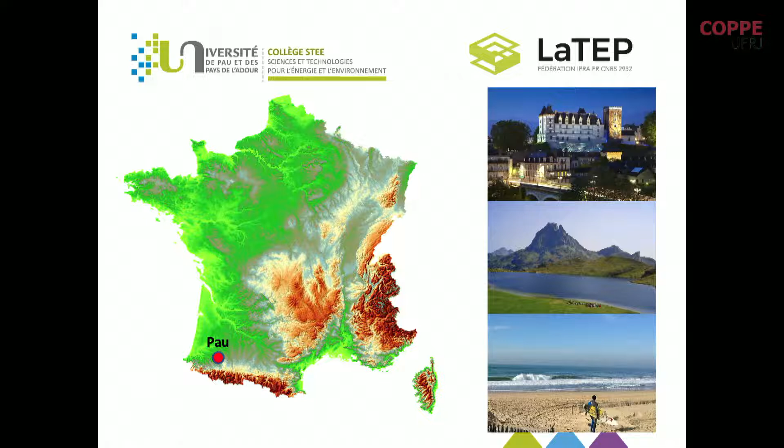Okay, so about my university. Since 2017, the University of Pau won an important award for excellence. It's called an I-SITE, and only 18 universities in France get this kind of award, so this is very important. We are the only small university, because we are only 15,000 students, that was able to win such an award, but that is because we have very powerful research activities, because the headquarters of the TotalEnergies group are located in Pau. So with the researchers of the University of Pau, plus some of the researchers of the research center of Total, there are about 1,000 people that work within this energy and environment solutions I-SITE.

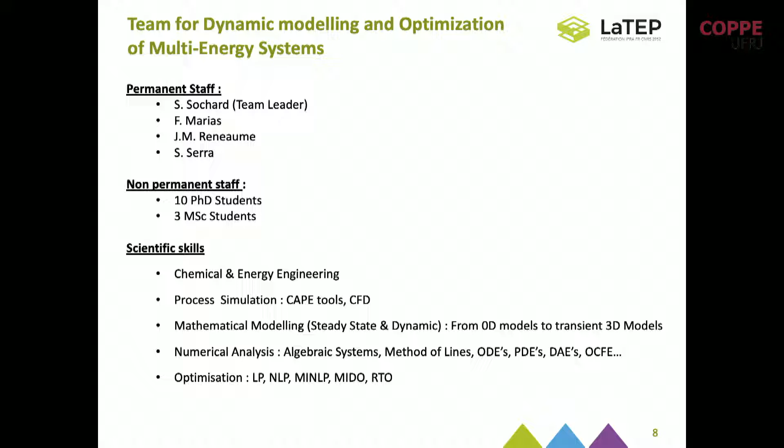Well, about our activities, the core of our activity is steady state and transient modeling and optimization of energy systems. So the skills that we need to do such research activity are, at first, basics in energy and process engineering. So of course, thermodynamics, heat and mass transfer, fluid mechanics, computational fluid dynamics, unit operations.

We also need skills in optimization: linear programming, nonlinear programming, mixed integer nonlinear programming, and so on, dynamic optimization, and recently dynamic real-time optimization, and also optimal control. Of course, we need some numerical analysis, so numerical methods, and we are still programming in Fortran. Maybe it sounds like an old language, but we still use it, and also MATLAB and C++.

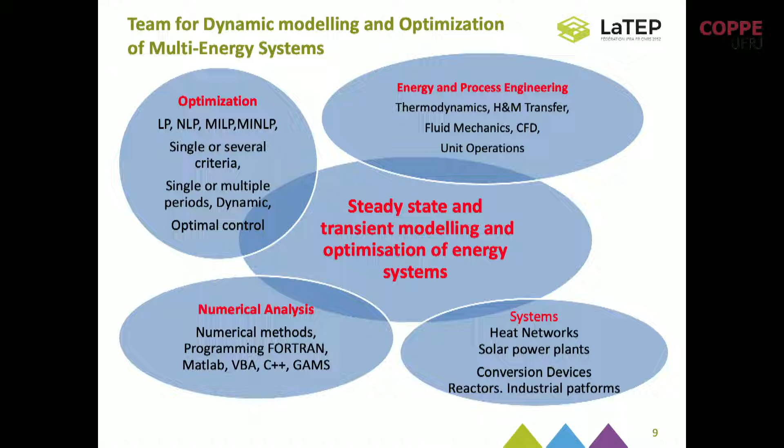And the systems on which we focus are heat networks, solar power plants, conversion devices, and reactors and industrial platforms. So here is the scope of all of our activities. We have here the primary energy sources: the sun, the wind, hydroelectricity, biomass, geothermy.

And so we have all these primary sources that are renewable, and we need to convert them so that we can produce electricity, which is going into the grid, produce gas that is going to be circulated in a gas network, and produce heat and cold that are going to be delivered to habitations through pipes and networks. So we are speaking here, for example, about conversion.

So biomass can be converted into gas using anaerobic digestion or gasification. When you do anaerobic digestion, you produce, of course, some methane, but also some CO2. So if you add hydrogen to this carbon dioxide, you can run the Sabatier reaction and then produce methane. And to produce the hydrogen, you can have solar panels that produce electricity, which goes to an electrolyzer that will produce the hydrogen.

So we build mathematical models of these units, and then our goal is how we can make them work together in the most efficient way. For example, regarding the demand for heat or gas, regarding the weather forecast, how the sun shines, what is the operation that we should run? Should we put into operation the catalytic Sabatier reactor or not, or store? This is all of this. We want to optimize such operation.

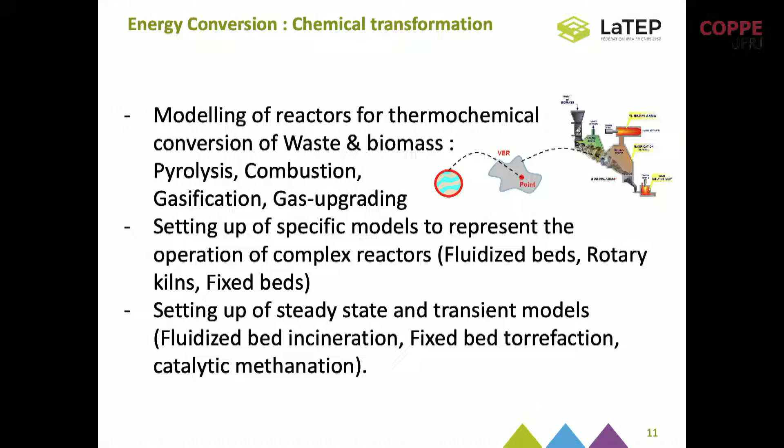So at first, a historical study that deals with fluidized bed incineration of sewage sludge. It's historical because this was the subject of my thesis some years ago. Here we've got an industrial fluidized bed reactor for incineration of sludge. As partners with the Veolia company, we built a mathematical model. We relied at first on Levenspiel's work on fluidized beds.

Then we considered that the bed was a bubbling one. So we built an assembly of reactors. The bubbles circulate as a plug flow. We have a CSTR for the other part of the gas and two plug flow reactors for the freeboard of the reactor. Using this kind of assembly of ideal reactors that we all know in chemical engineering, we were able to understand how the incineration of sludge operated within the reactor.

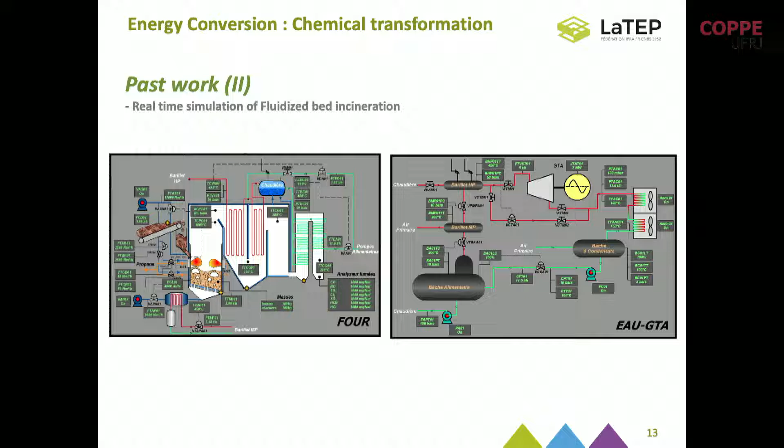Another activity: with this first model, we built a real-time simulator for fluidized bed incineration. This kind of tool is used for the training of the operators. By now, when Technip, for example, builds some refinery for Qatar, for Saudi Arabia, or wherever, they also provide a real-time simulator for the training of the operators, because it's very convenient to have a numerical twin of the plant. So we did it for this fluidized bed incineration of sewage sludge.

Another activity that we have is linked to the pyrolysis of waste and biomass. Indeed, as we are building some mathematical models, the first step is the reaction pathway of pyrolysis. What happens when you heat a solid? Classically, we do it in a TGA for the thermal analysis. But in the TGA, you can only have samples of 2 to 5 milligrams. And it's so few when you are dealing with waste.

It's not relevant. So we have built this tool, which is a big TGA, which can hold up to 1 kilogram of waste. It is exactly the same as a classical TGA, except that we have a big load of waste that we can put inside. And you've got this furnace, we can control the heating rate, and we recover the products of the pyrolysis. We recover the condensable part, which are the primary tars, and we recover the permanent gases.

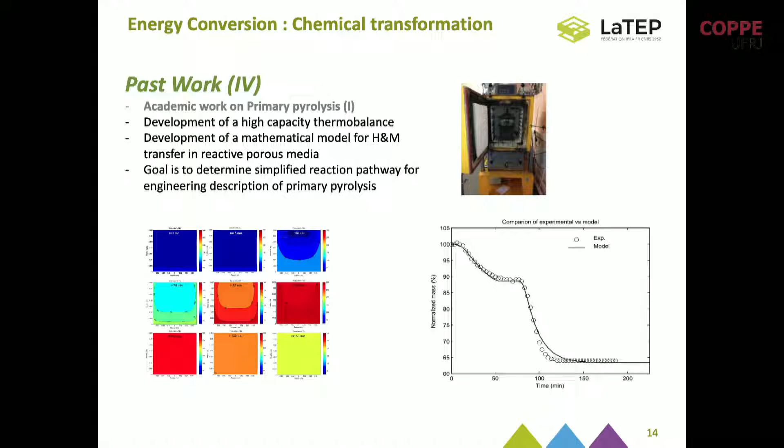And so if we look at the mass loss as a function of time, this mass loss with the dots corresponds to the experimental one, which is continuously measured, because here we've got a balance which is cooled and which allows for the weighing of the basket. And so we see that we have excellent agreement between the model and the experiments.

Another activity now is a collaboration that we have with Marco Castaldi at City College of New York and the Free University of Bolzano in Italy. Still we focus here on the primary pyrolysis. The system that we have is, for example, a sphere of wood. We locate here a thermocouple and a probe. This probe is linked to a gas chromatograph that will, every 3 minutes I think, pump inside the wood particle to extract the gases that are produced and give information on the primary products.

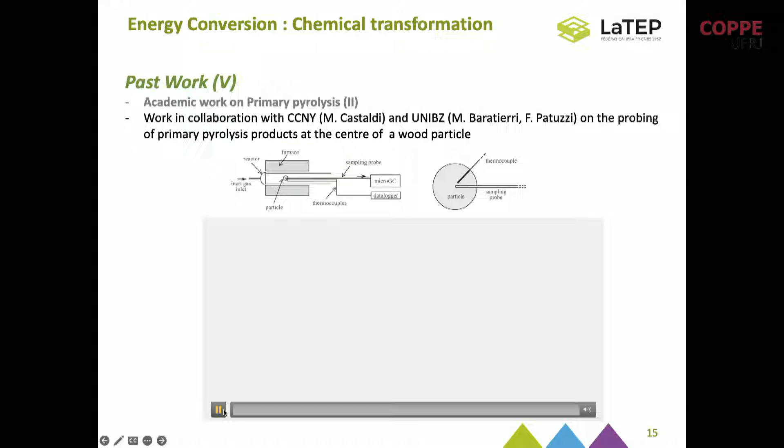Well, it's not, I can't do it as I would like to do. Okay. Okay, so, but we are able to predict. Okay, I should have done this.

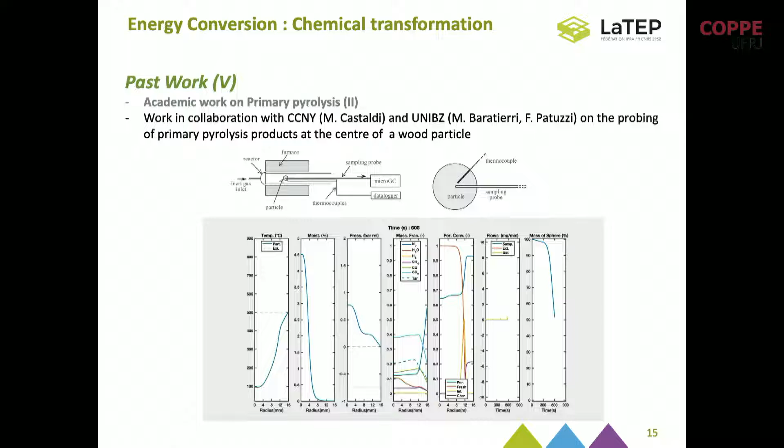Okay, so next. We also work on the thermal cracking of tars. When you deal with gasification, the main drawback for gasification is that you are producing heavy tars, like naphthalene, like benzene, like toluene. And so with a company which is called Europlasma, they built a gasification process with a gasifier and a high temperature unit to crack the tars that were produced during gasification. And the main characteristic of this reactor is that the high temperature is reached thanks to a plasma torch.

Okay? So we started from almost nothing. We start from a literature review to understand what are the tars that were produced. And so we begin to think about 4 model compounds, which were phenol, naphthalene, toluene, and benzene. And then, thanks to literature, we built the reaction pathway that can explain the degradation of tars through methane, through soot, through acetylene, and then at the end, the transformation of tars into carbon monoxide and hydrogen. What is interesting in thermal cracking the tars is that you keep the lower heating value. So we start from there.

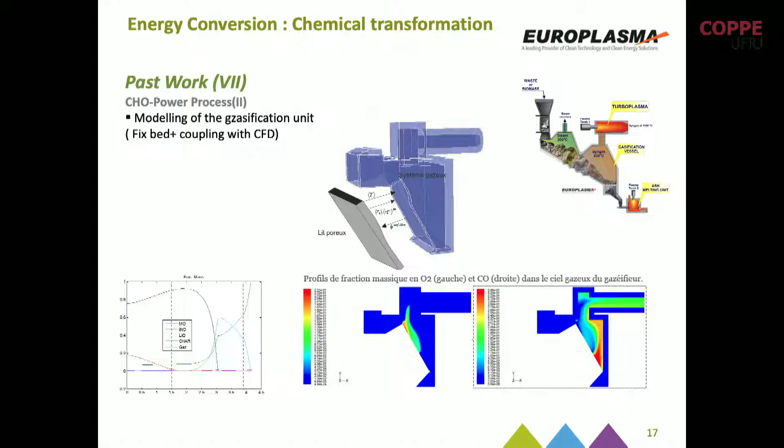And the homemade model is also able to compute the composition and the mass flow rate of volatiles that are released into the freeboard of the reactor. And so you have the coupling. And then you are able to understand how the gasification is operated. And just here, you've got this reactor. Okay, it's in the wrong order. I'm sorry about this.

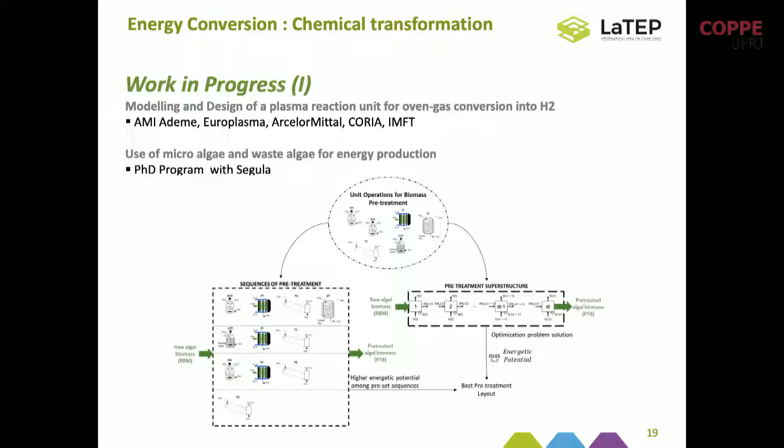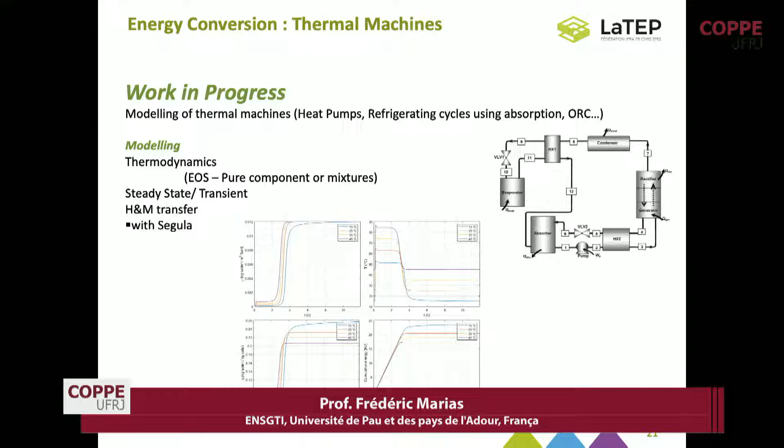Okay, we are also working on the adsorption machine, because when you speak about heat networks, the heat is produced, for example, by a biomass plant. But a biomass plant cannot be shut down and started up as we would like to do. So we need to store the energy when there is no demand. And so one possible way to store the energy could be by adsorption, meaning when we have, for example, some zeolites, if we adsorb some water on zeolite, we release the heat, while if we desorb, we store the heat. So it's a convenient way, and we have built a dynamic model to understand how heat could be stored and restored to the network.

Now, some important work that we are doing. I'm no longer in the field of conversion, but in the field of solar power plants. In some past work, we performed dynamic optimization of a solar power plant. A typical solar power plant is that one. We've got a solar field where we have solar panels that convert the sun irradiation into heat. This heat circulates in some pipes. Thanks to a heat exchanger, the heat can be stored and then finally delivered to some consumer.

Okay? So the first step was the mixed integer dynamic optimization of this kind of unit. I mean, we know the weather forecast and we know the demand. And so our algorithm computes the mass flow rate of water that should flow into the solar panel, that should flow into the storage tank, and so on. So this is a dynamic optimization problem, and our optimization variables are the mass flow rates of water that circulate in the whole system.

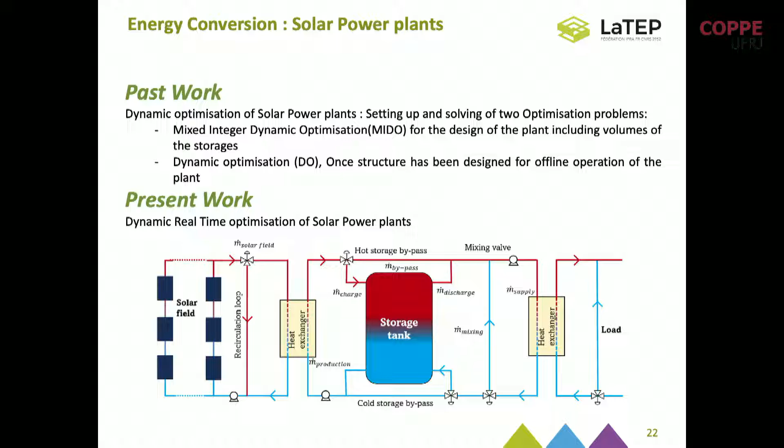So we had this optimization, but our present work deals with dynamic real-time optimization. Indeed, as I mentioned, the operation of the plant is driven by the weather forecast and the demand forecast. But weather forecasts are not 100% sure, so there might be deviations from the forecast. And if we have such a deviation, what do we do? Because what we computed as optimal is no longer optimal. So to do so, we use dynamic real-time optimization. And we are working on this with Professor Galo Carrillo Le Roux at USP, whom you know.

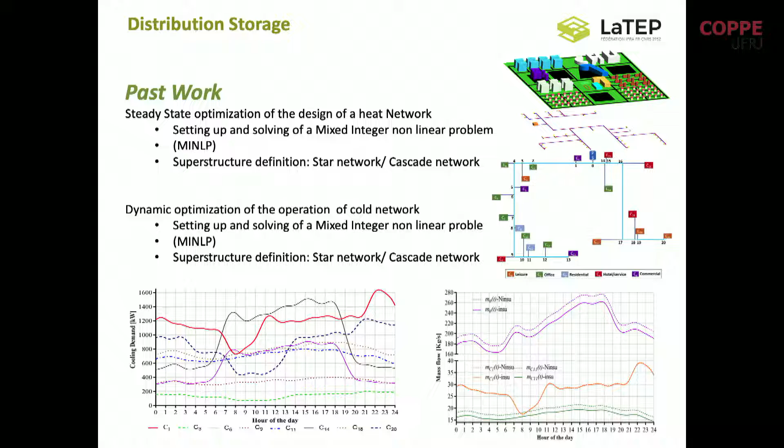So we designed a superstructure, and then the dynamic optimization algorithm was used to compute the structure and the diameter of the pipes. And also, if we finally have this network, regarding the demand here, which corresponds to the demand in habitations, malls, and so on, we are able to compute the mass flow rate in every pipe. Those are our optimization variables, and those are the results of the computation. You can see that we made the simulation with insulated pipes and non-insulated pipes. This is the optimization variable, the mass flow rate that circulates inside the network.

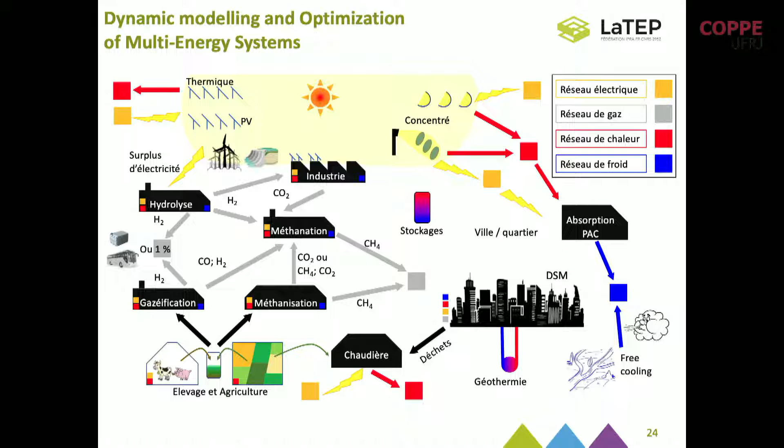Okay, so what I've shown you is that we have built models for this, for this, for this, for storage as well, and for absorption. But now, our aim is to put all these things together. So now we are working on several couplings: coupling electrolysis with a methanation reactor and with anaerobic digestion, because the three will need to work together.

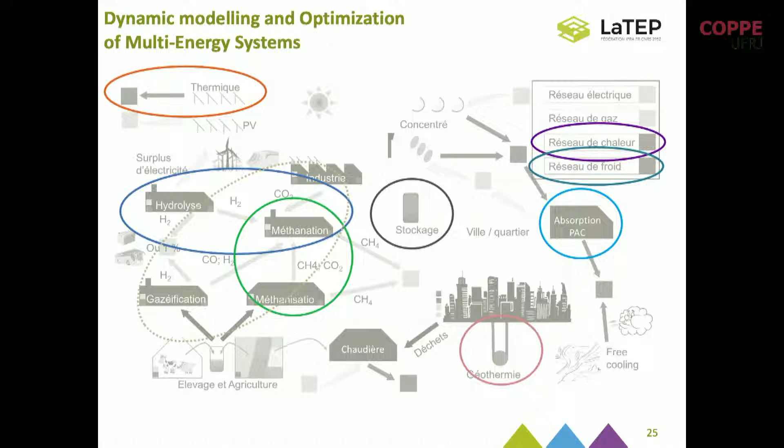In my city, in Pau, there is a plant that is going to be built at the wastewater treatment plant. The sludge is going to be put into an anaerobic digester, and then it will be connected to a Sabatier reactor and coupled with an electrolyzer. So we are building the connection between all our models to be able to represent such a unit. And our aim is to build all of this. This is ambitious.

At present, a very important field we are working on is the dynamic optimization of multi-energy systems. We want to do real-time optimization and connect this with big data. At present, we've got a program called Impulse, with an industrial partner which owns a gas network in southwest France and works on the same topic.

And we are starting a work, very important for us, and maybe we can find some connection, which is called Réseau Data, because we are going to work on a heat network located in Bordeaux. This heat network has a very large number of sensors that give us real-time information on mass flow rate and temperature. And we would like to use artificial intelligence, neural networks, to build a black box model on which we will apply real-time dynamic optimization.

Okay? That's one project that we are going to start now. We are also building some new unit operations because at present time we do not have any model for anaerobic digestion, and we are enhancing our models for gasification units because we've got the one for the grate furnace, but we would like to have a model for entrained flow reactor for gasification. So we are working on this as well.

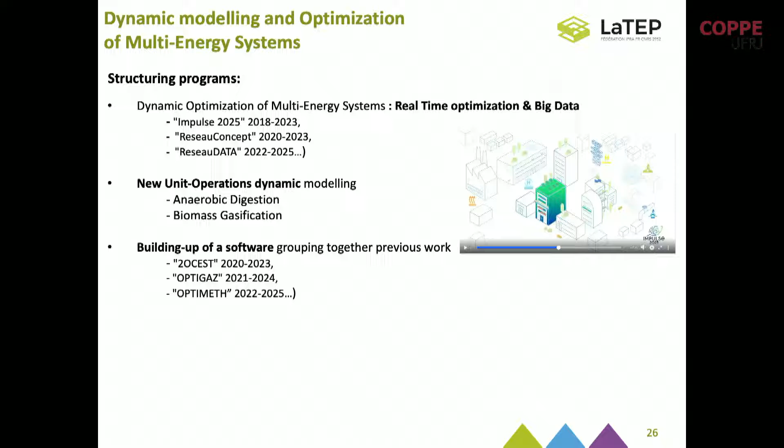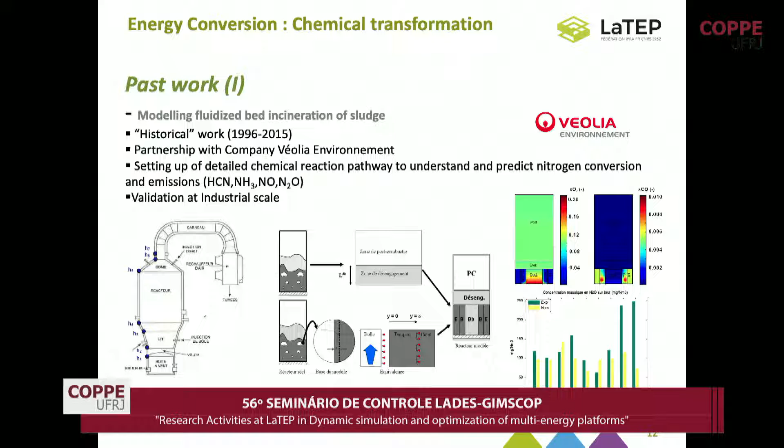Yes. But the bubble phase and the dense phase are just an idealization of those fluidized beds. It's not physically separated. No, they are not physically separated. But when you show this picture of their distribution, it seems that you are presenting this separation. Yes. This is a way to present the results. You're absolutely right. Indeed, the bubble phase is not continuous.

We have represented it as a plug flow reactor, but this is not a continuous phase, for sure. Yeah, but this is a way to represent, to some extent, how our model works. It looks like you are plotting the temperature, and in this case the concentration of oxygen, and here CO. This is oxygen and here this is carbon monoxide, which is more concentrated in the middle of the fluidized bed. But these are ideal regions, not the space of your reactor.

No, it corresponds indeed to that view, this idealization, not the real space of the reactor. Absolutely. This is only the way to represent what our model computes, given this very particular representation. Okay. Then when you compare to the experimental results, it's only the output of the process; you cannot measure inside. We don't have any sensors inside.

We have sensors at the output for the temperature and for the flue gas because they are controlled by environmental regulation. So we have only information about what happened at the end. But since we are speaking of very low concentrations, in milligrams per normal cubic metre, it's 100, very low. So we think that if we are able to have such a good fit with the experimental values, maybe what we have inside is good, but we have not measured it.

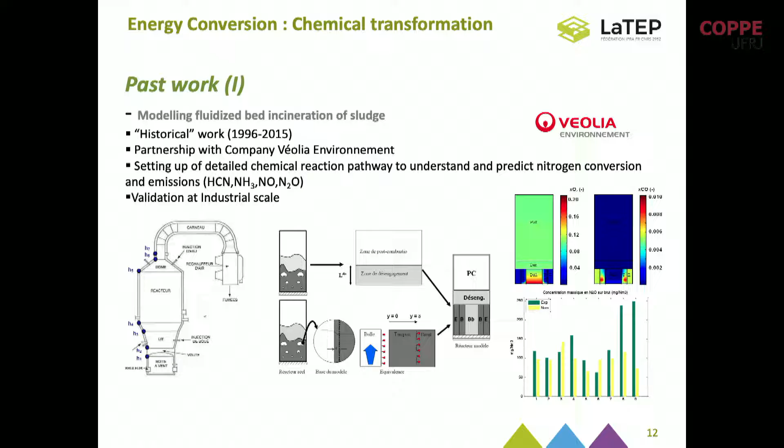What sludge are you talking about? I think this is secondary sludge from wastewater treatment. Secondary sludge from wastewater treatment. This is bacteria, almost microgranules.

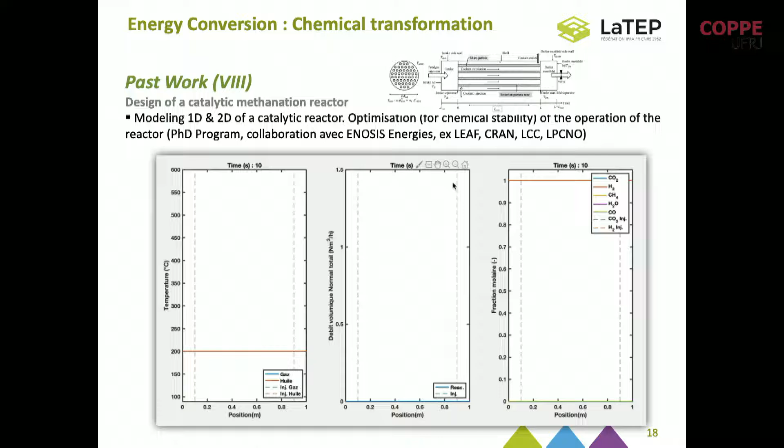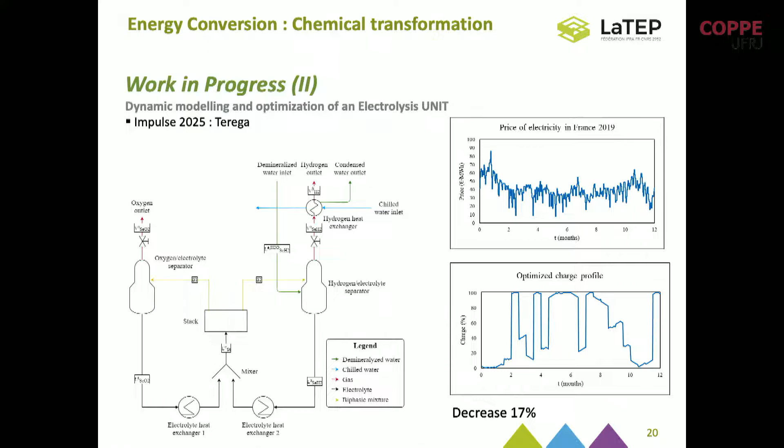Yes, this one. Do you also evaluate shutdown? Because I see there are moments where the production is almost nothing. Yeah, sometimes when the price is very high, the electrolyzer is shut down. This is an alkaline electrolyzer, so it can be easily shut down and restarted. This is not a high temperature electrolyzer, for which it would be different, and for us that would mean constraints.

Because I was thinking, did you shut down the plants sometimes, if the price got high? Yes, that's the case. Here it's shut down, it is not operated, when the price is very high. It should be winter, because in France most electricity is consumed during winter, when a lot of heating devices are operated in homes. Here it's summer, so your summer is our winter, so maybe we could have the same curve.